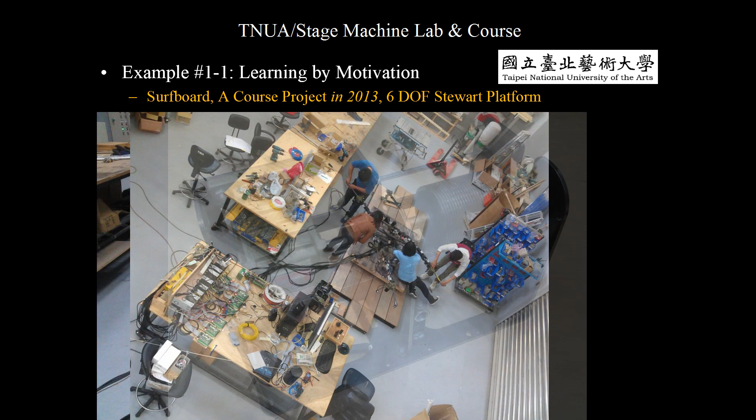My first example to share was a project for an advanced course in technical design. In theatrical department, all design processes have to mix the hands-on experience with design works. The topics of the projects were determined not only by myself, but also by my students, who would raise their choices according to their interest or enthusiasm about anything. As their instructor, I would advise and pick whatever could be the most appropriate for their learning curve.

In 2013, the students made a wish to build a mechanical surfboard, which might be used on stage. The famous movie directed by Ang Lee, Life of Pi, immediately came into my mind, where the Bengal tiger spent its last part of life with the protagonist Pi on a boat, which was animated by a mechanism called Stewart Platform.

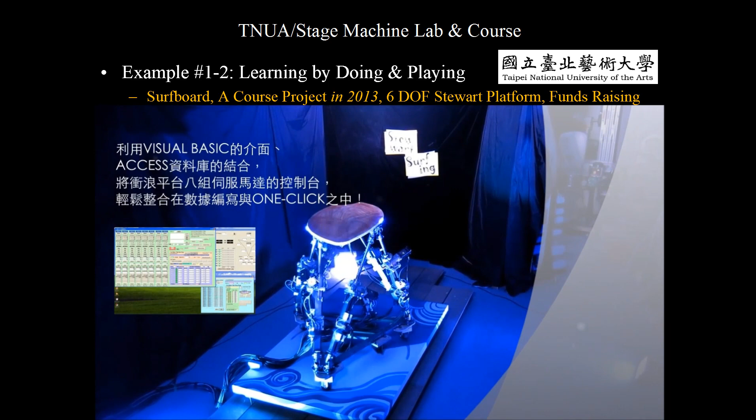Stewart Platform is a beautiful mechanical structure with 6 degrees of freedom, which are controlled by 6 individual linear actuators. Besides, the application could be used in Life of Pi or flight simulators.

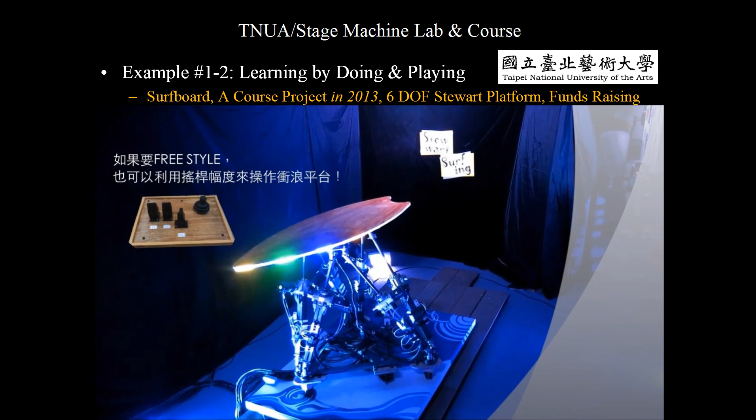I didn't know anything about Stewart Platform or how it works, but learning by doing is always the best golden rule. The more practical and the deeper I worked on it, the more exquisite I found about Stewart Platform.

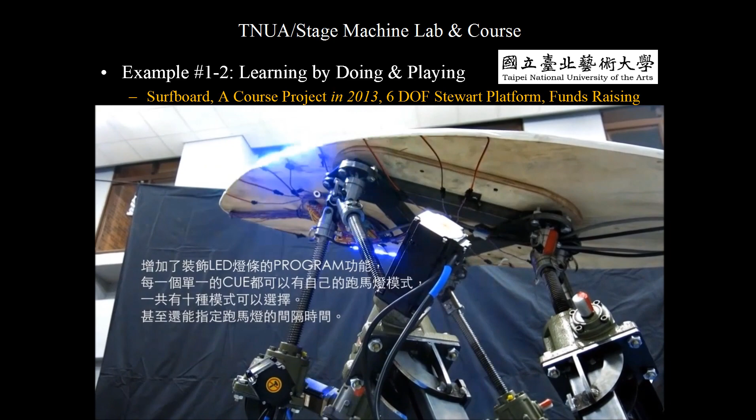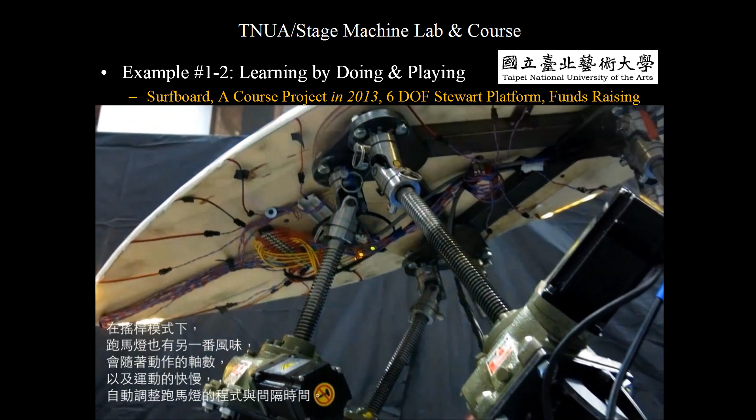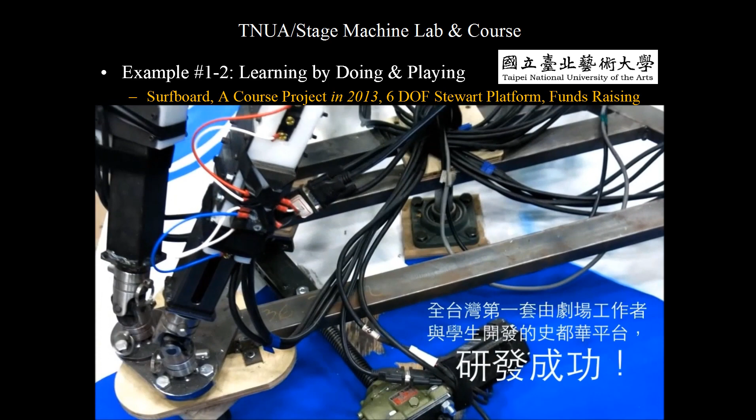4 technical design students and I worked together to design and discuss how to make it work. As soon as we had the whole plan, we found we couldn't afford it in our course. So we came up with the idea of raising funds through an internet platform, Flying V, and did get enough funds for our project. Through the project, we learned a lot about mechanical parts, positioning control, etc. And I also refreshed some of my programming skills such as Visual Basic.

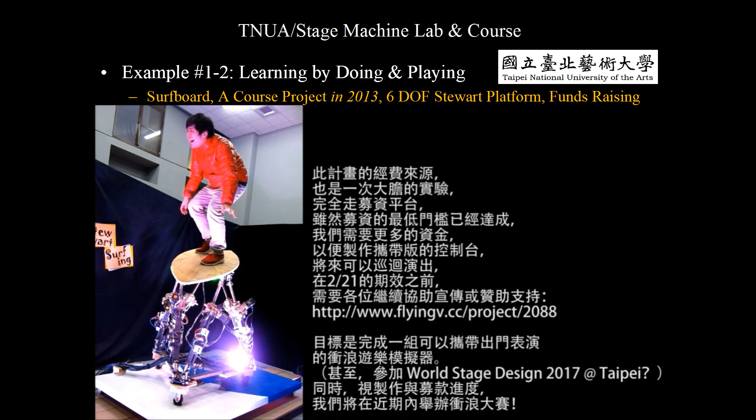The surfboard project did open a new window for my Stage Machine Lab. Year 2013 was kind of an important year for me, in addition to the surfboard. I began to attend stage automation for rock concerts in Taiwan. My new Stewart Platform work in TNUA aroused quite a sensation in Taiwan.

I was interviewed by newspaper, magazine, even the TV program. In the YouTube channel I run, many people asked me if they can, or where to, buy or rent such a surfboard on Earth. It's a mission impossible for me because I don't have a company, and, most importantly, the work in 2013 is just a mock-up without the possibility to be toured, due to its poor mobility.

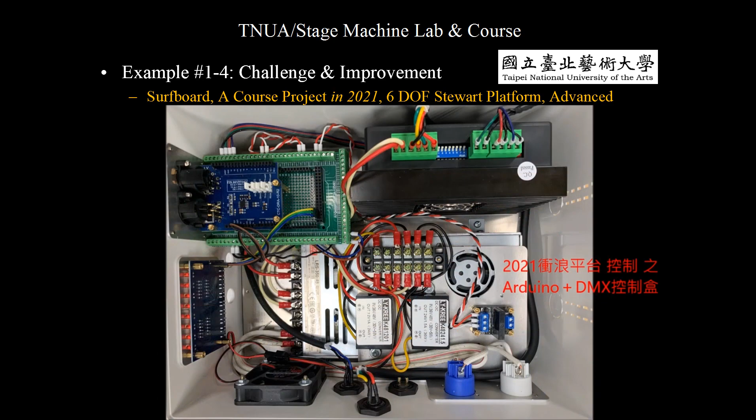8 years later, a local government officer asked me if I could send my automated surfboard to Taidong, where an international surfing game was to be held in 3 months. At that period, I had been using Arduino to teach technical design students as a tool to learn programming and automation for 5 years. The long history of inquiries for a surfboard to buy or rent became a thrust pushing me to renovate the surfboard machines.

The goals are to make it portable, easy to use and maintain, and controllable by theatrical lighting console.

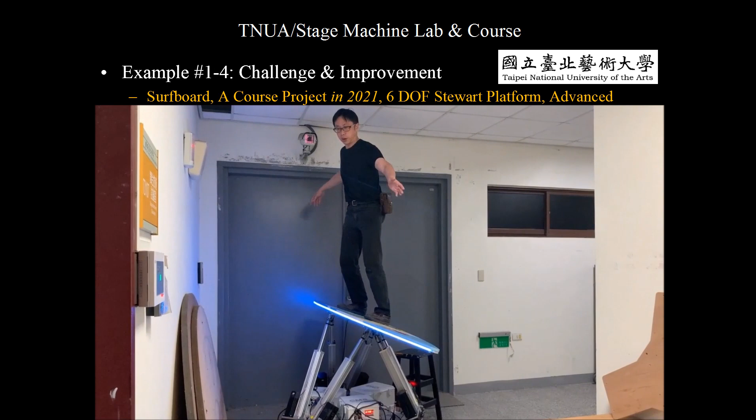With experience of 8 more years, and funding from CMS, I designed and built this new version in time for the international game, where it was displayed and provided publicly for free rides. The most special feature of the new surfboard was that the automation was triggered by lighting console, where I used simulating lighting console software on a laptop to set up the cues for the ride sequences at 5 different levels from easy to difficult. There were more than 300 people joining that free ride with a quite thrilling experience.

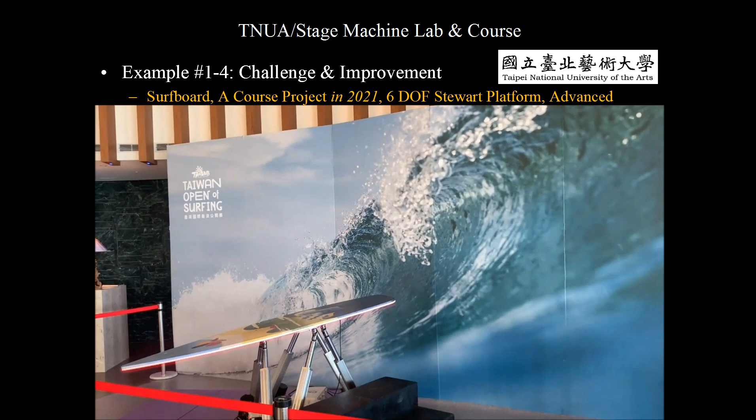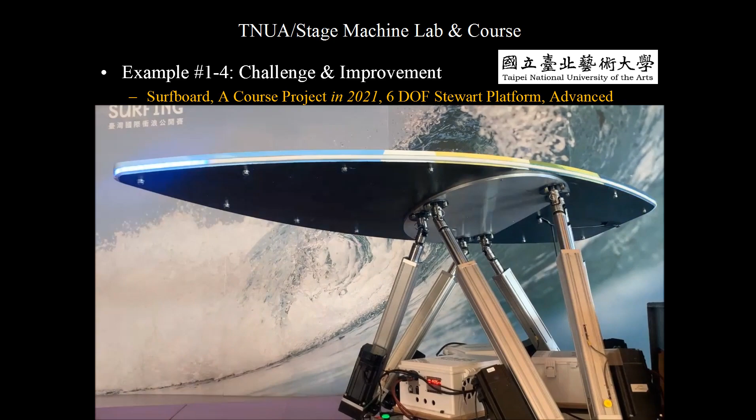The courage to open it to the public meant my confidence about the updated surfboard. I was so satisfied by the result, but the story didn't end yet. One year later, CMS even sold one more set, ordered by a company whose business was equipment testing, whose capital assets were more than $16 million, and whose number of employees was more than 250.

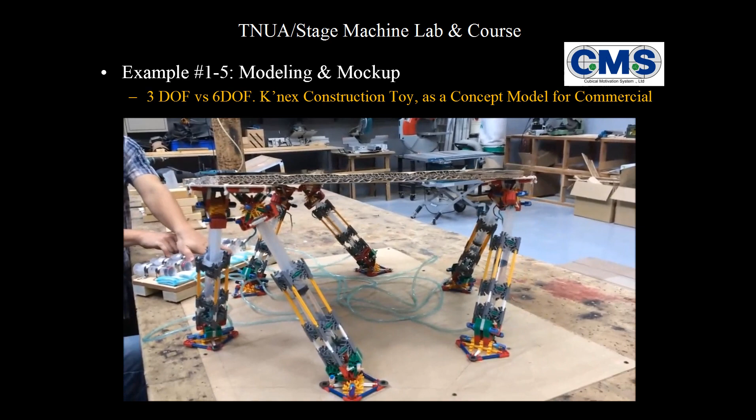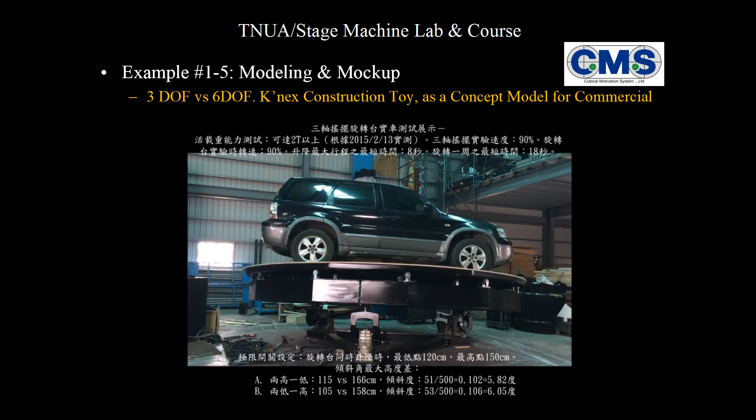In my lab and related courses, I often use a lot of toys or simple hardware to simulate stage machines. For example, I love a building block toy called K'nex, which could create a lot of simulation for mechanical motions. The 6-axis Stewart platform mechanism has some height issues when used in large-scale applications. After my research, I found that a 3-axis crank mechanism with universal joints would do the job with lesser height. I designed this monster, which could carry an SUV while spinning and tilting it in 3 dimensions.

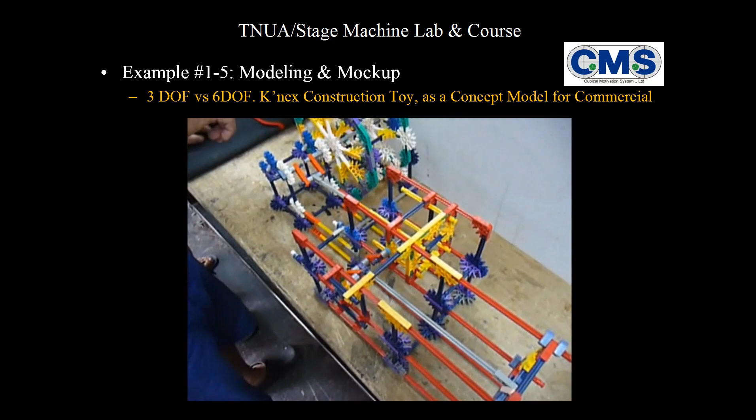From toy to practical work, K'nex gives me a lot of fun and bears a lot of potential for evaluating new ideas. Believe it or not, my accidental encounter with it came from a birthday gift I bought for my best friend's son. I never thought about using it as a tool until one day my friend told me that his son played with it for many years and never got bored.

For more than 10 years, I have been invited by Wu Zhen Festival as the technical consultant for international companies. In 2016, I flew over to Wu Zhen for a site visit with the technical team from a German company. I traveled with my wife Jessie and happened to visit the local museum, witnessing the beautiful creative work by Korean artist Cho Yu Ram. It's delicately and sensationally built and a lot of fun to watch.

Then I turned to my wife and said, 'I can do this too. But I am not an artist, I am a technical designer of the theater. So there's no director or designer ever asking me to do that.'

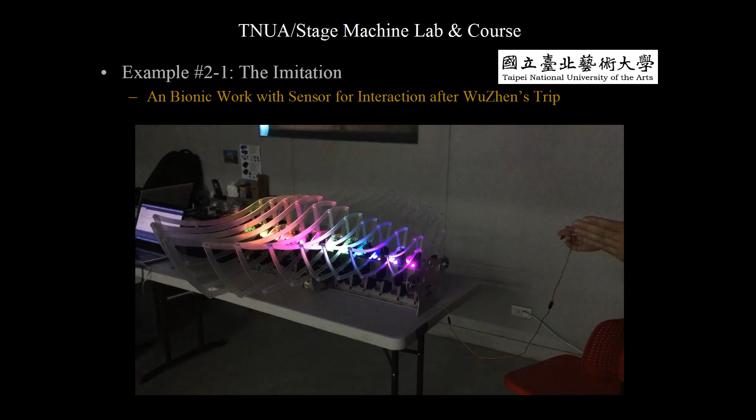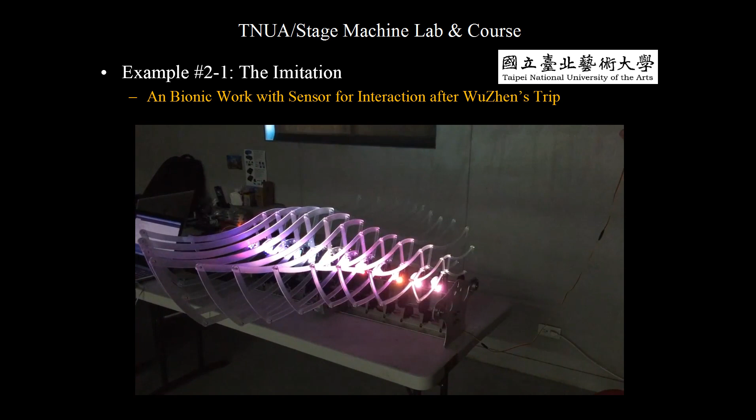By 2016, I hadn't used any 3D printing technique or operated any laser cut machine on my own. Our department happened to purchase a 3D printer and laser cut machine that summer. I have been a 3D CAD fanatic since I learned AutoCAD at Yale in 1998.

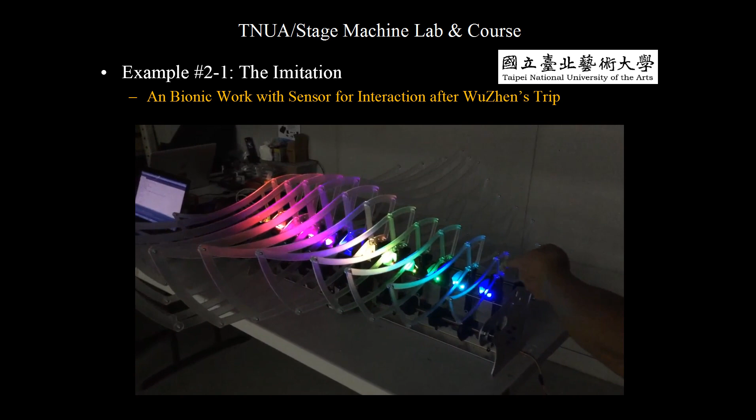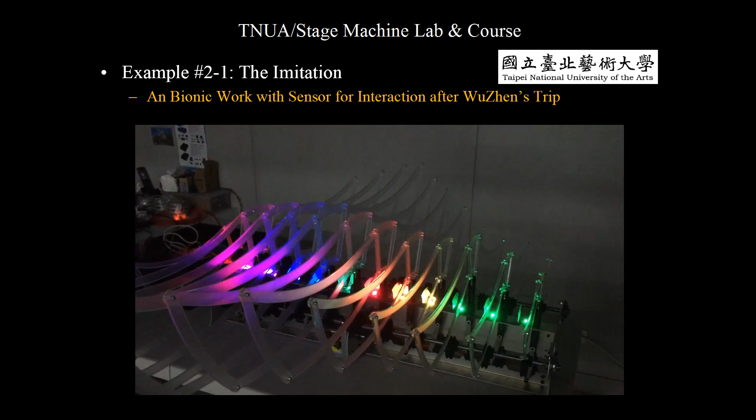After I came back from Wu Zhen, I quickly designed a simple bionic machine, inspired by Cho Yu Ram's work, and created this piece in 2 weeks using just our 3D printer and laser cut machine, with some servo motors, which has a sinusoidal motion on its spine, and an irregular jerky motion at random moments through coding. I also applied some simple LED lighting effects on this unnamed bionic work, which would respond to the dB value of a mic sensor with the lights changing into different extents of scary white.

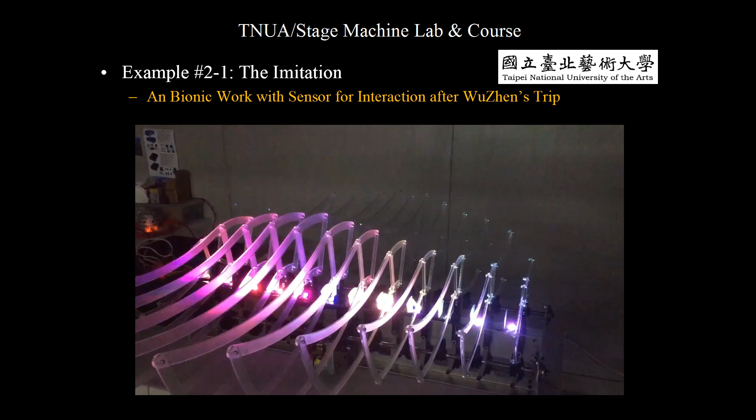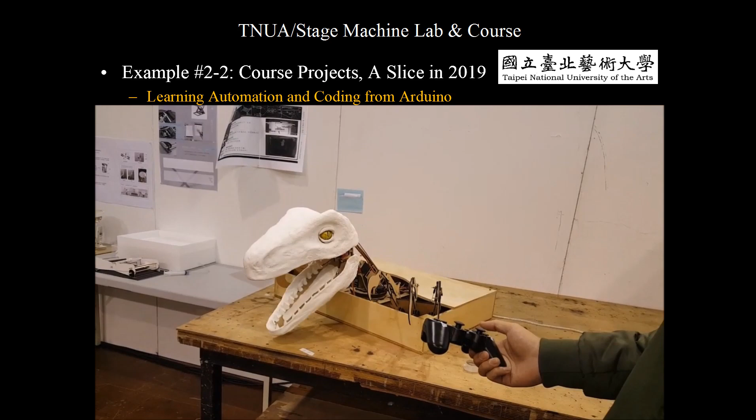I kind of fell in love with this creative process, although I still had no time for it given my teaching jobs. I want to show some works from the students I was teaching after I upgraded myself with Arduino. This is the first time I put mechanical design and programming together to teach technical major students of the junior year.

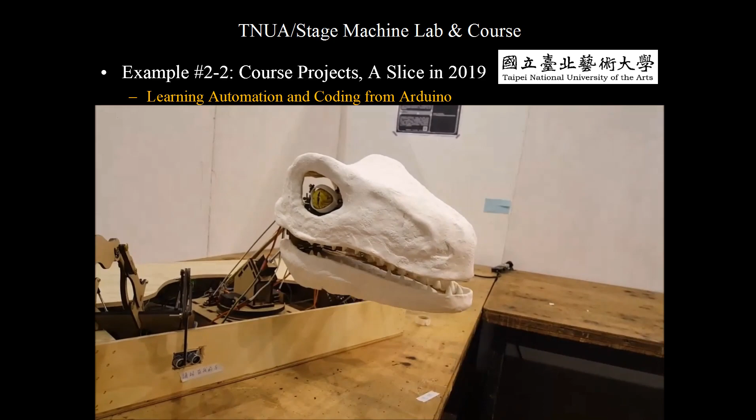Although it was kind of a teaching experiment, the results are quite exciting. As you can see in the video, these works represent a lot of potential from idea to realization. I always say, no matter if it is about learning or working, the motivation matters.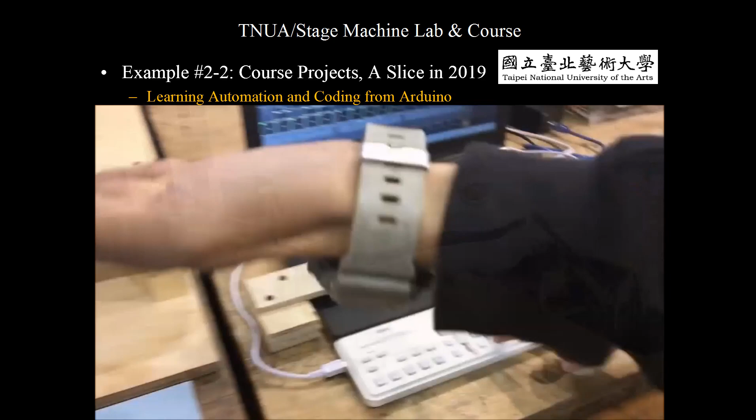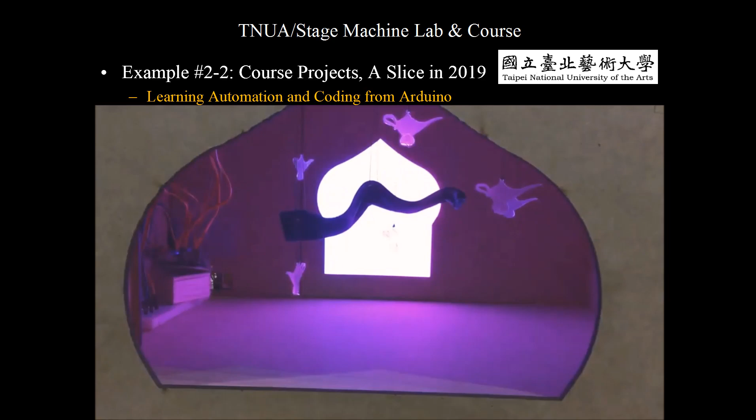In these final projects of a semester, for the very first time in their lives, the students touched the motor, wired the circuits, designed the mechanism, and wrote the Arduino programs. Many of them did excellent jobs, and even surprised themselves and their parents.

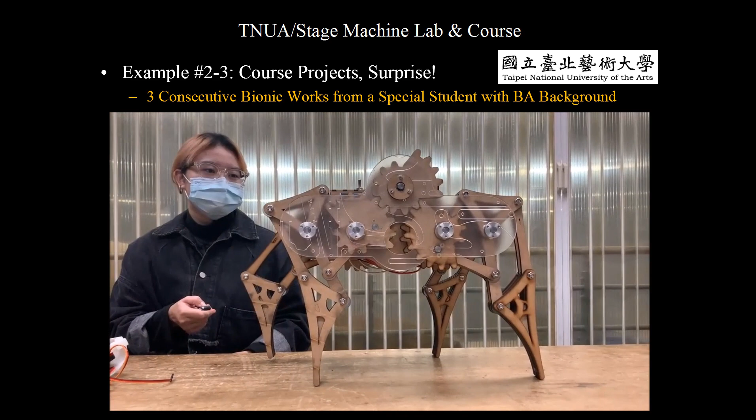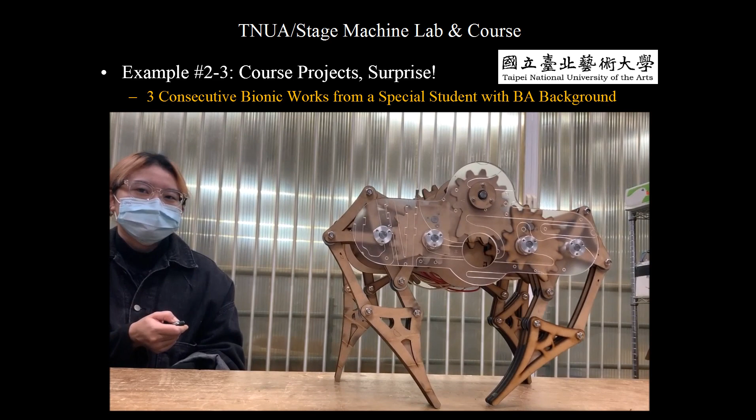In my lecture, I often introduced this special student to my audience. Miss Ru Ho Xiao obtained her bachelor degree in German Language and Culture Department. With such a background but strong motivation for learning, she entered my graduate program and majored in technical design under my guidance. During her two years of study, she had done three different amazing works with bionic projects, surprising those who knew her background. In fact, she might become the ninth student that I had taught and recommended who got admission into Yale School of Drama, where I graduated from as well.

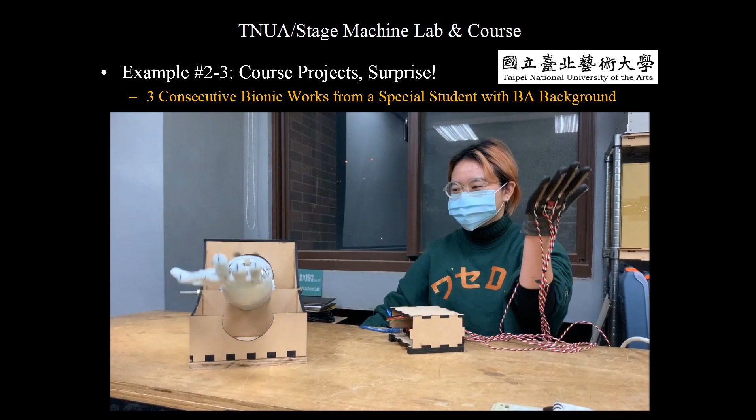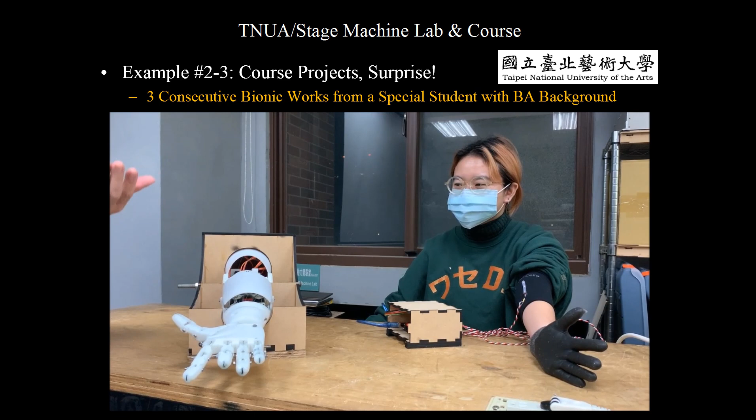In her work titled Robotic Arm, using the sensor of a simple flex resistor, she created a new approach for my lab. Bionic projects often appear in my lab works.

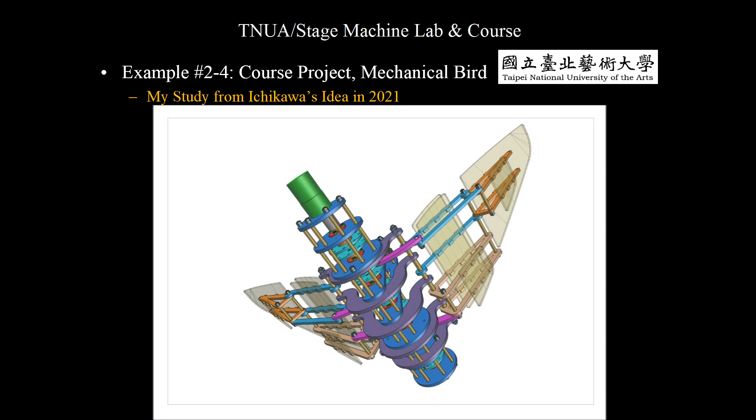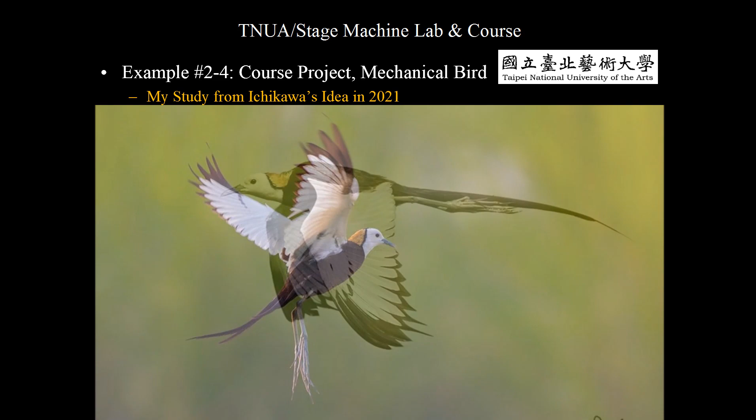In 2021, besides the new surfboard, I also worked on an interesting project about a mechanical bird. A junior high school president in a rural county asked me to help design and build an animated waterfowl. Before that, I had done a lot of projects using linkage mechanisms, but I didn't know how to do it properly. I sought inspiration by Googling the topic, and the best solution seemed to be Ichikawa's idea. Unfortunately, the information I could find was only some simple illustrations without much detail. And there seemed to be no one who had ever realized his idea in life, which was to use just one motor to drive both the inner and outer wings at the same time.

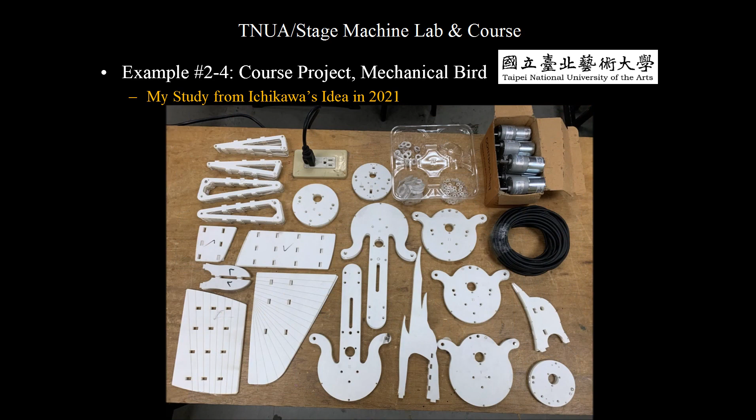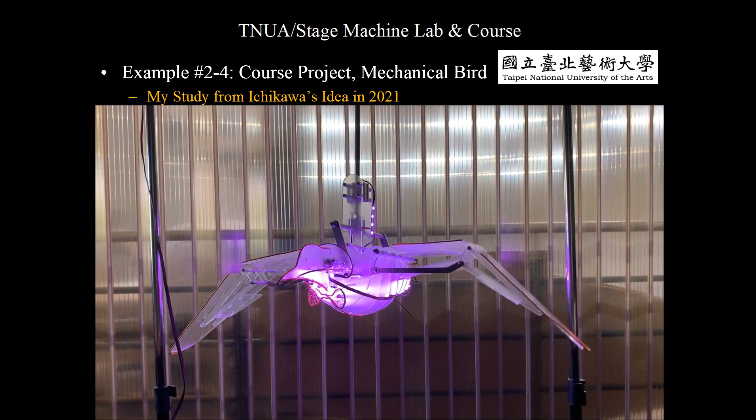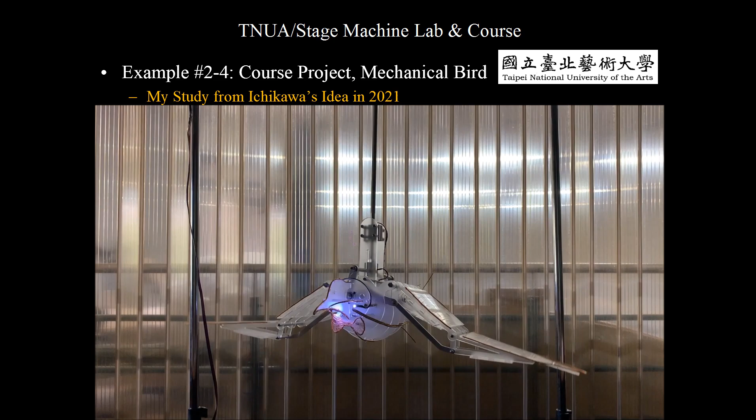I utilized AutoCAD's parametric design and simulation to revise the geometric proportion of the bird's wings several times. Meanwhile, I added a creative idea that the bird's body could also have an up and down motion by the same motor. The result was quite amazing, and it became the opening ceremony of the junior high school's art festival. Later, they even held an activity for families, parents, and young children to experience assembling the birds.

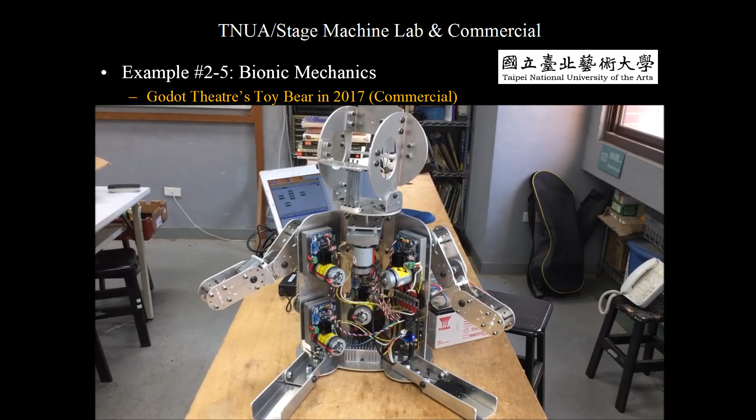Another bionic project was the toy bear for a commercial theater production in 2017. In this play, the toy bear was a gift from the father to his daughter. The director's request was quite simple, that the bear had to move his head or arms for simple responses. This project involved simple mechanical design, big servos, and remote control through PS2. I divided the motions into certain groups of commands as combinations for the director's choice.

The toy bear looked like a regular one until the last moment of the play. The father passed away and became an angel to guard his daughter. One day, when the daughter missed the father and talked to the bear, the bear suddenly moved and responded to the daughter's words.

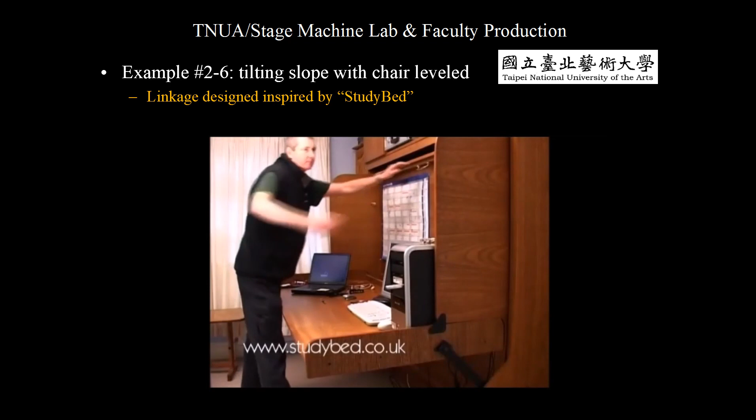Another class example I want to mention today was a personal project. One of the students in the TD group came to me and asked to do a project like a study bed. We took about 30 minutes to discuss how it worked, and due to limited storage space, turned that into a project called study sofa.

One semester later, we ran into a production requiring a similar mechanism. At first sight, they looked very different. However, these two projects applied exactly the same principle, which I call parallelism. Again, it turned out to be a successful project in terms of final results and learning effects.

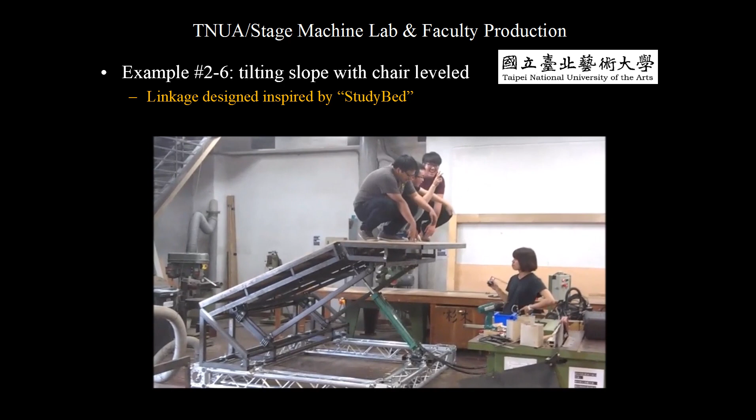This is how I enjoy my career. The projects for the lab or the courses could extend into professional fields, as long as the experiments are thorough, informative, instructive, and inspiring. And here is what I told the students often: don't ignore any experience you've learned from any experiment, which might become the critical solution for your next project.

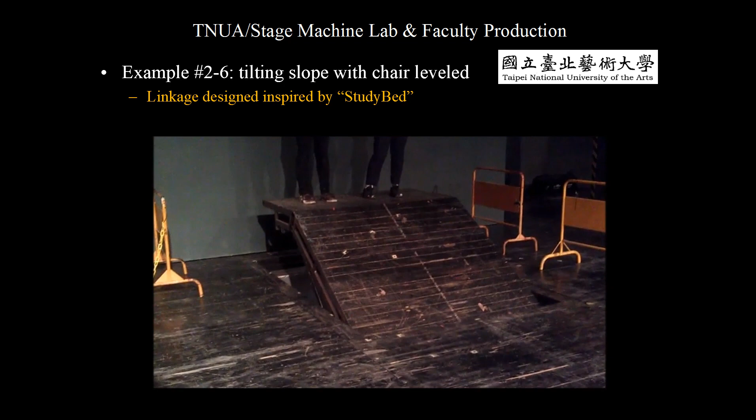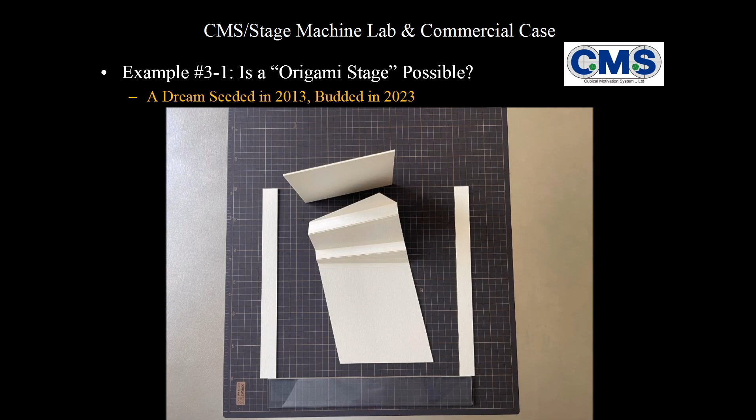The next example was also related to the linkage mechanism. The origami and paper cutting are the visual tones of the dancing work called My Dear Ho's dance company, MeImage, produced it in 2013 and entered into the final contest of the five best works in Taishin Arts Award, which has been the most eminent art competition in Taiwan.

I dared not answer Ho's request for cooperation because, first, the folding of non-rectangular shapes was quite difficult in terms of positioning control, as well as supporting the dancer's body on a floating stage.

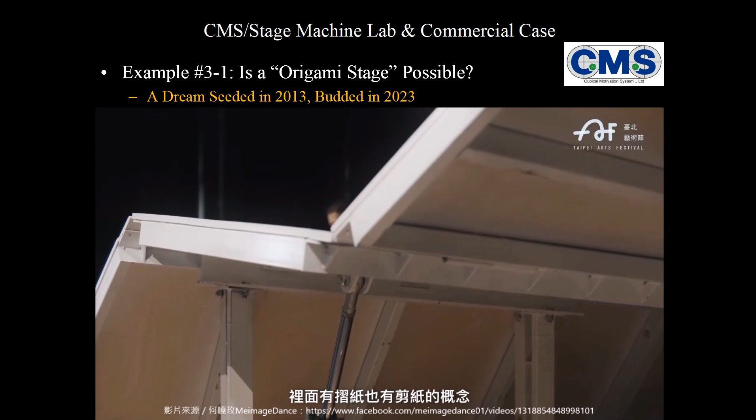Second, I was not competent enough at that time to deal with the material, mechanism, and the motion control simultaneously. In spite of its achievement, Professor Ho's wish for folding the stage had never been realized until this year, 2023.

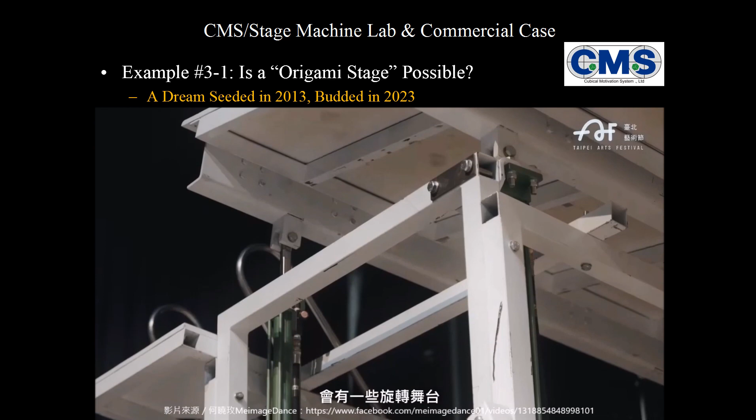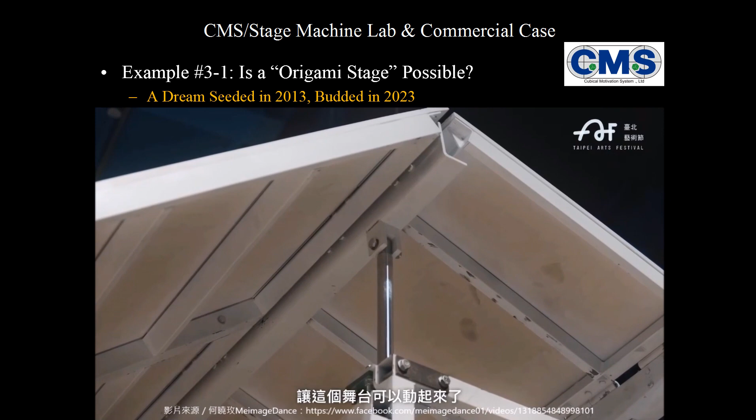At the end of last year, as the dean of the dance school in TNUA, Ho was invited to revive My Dear for Taipei Arts Festival. And she came to me for the folding stage again. I guessed I had more courage than ever, so we began to work on the possibility. During the design period, our proposal to the Culture Ministry for funding was rejected, but we didn't quit. Without enough funding, especially from the government, I came up with some weird idea.

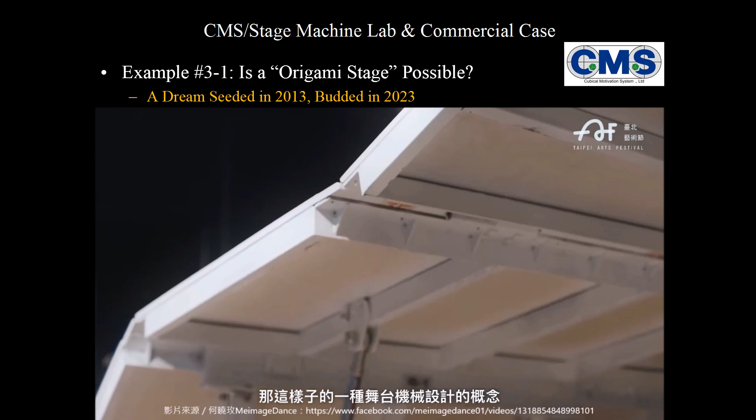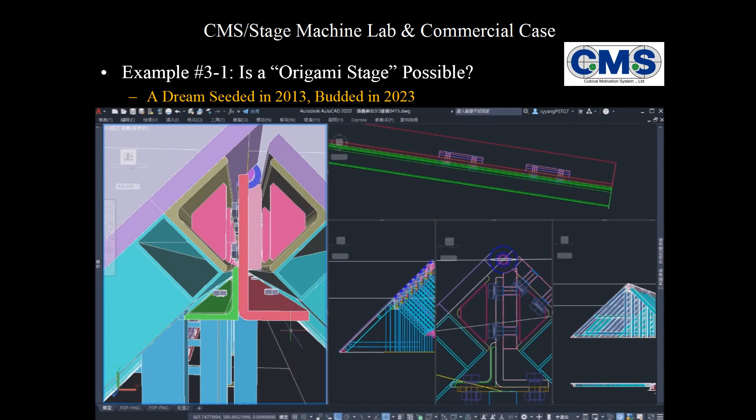For motion of a stage deck like this, with non-uniform travel distances among all the linear actuators, designers often incline towards using servo or encoder feedback systems to have precise motion control. But it is certainly very expensive, and meanwhile it would be very difficult to predict the distance command for each individual axis without destroying the decks by mistake. My weird idea could be relatively simple and much cheaper.

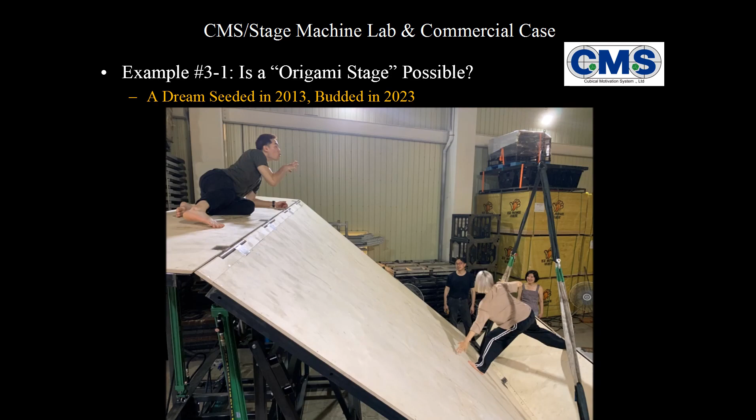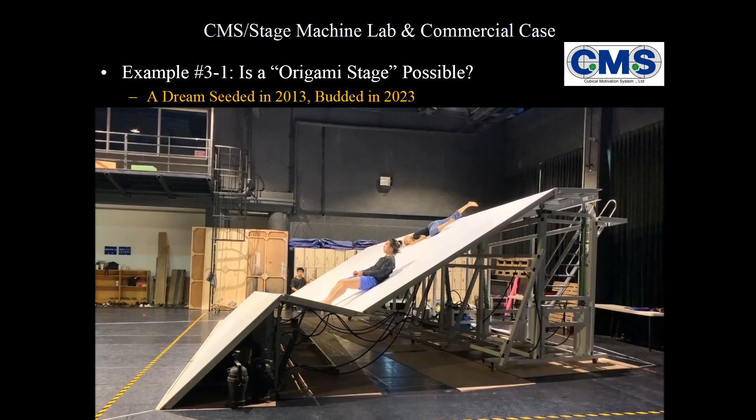By using the hydraulic system and applying Pascal's principle, which means a pressure change at any point in a confined and incompressible fluid would be fully transmitted throughout the fluid. The principle could explain how the lifting fluid jack works, and could apply in countless industries. With Pascal's principle, use hydraulic cylinders to drive the deck, and make sure all the cylinders on the same ridge line share one confined tubing. When the cylinders with the same tubing drive the ridge line, the pressure would be transmitted to support the deck. But the travel distance of the cylinders would be restricted by the rigidity of the irregular decks. As long as the decks and the hinges between them are strong enough, the origami goal would be achieved.

If we have time, I would like to share with you this clip of the performance.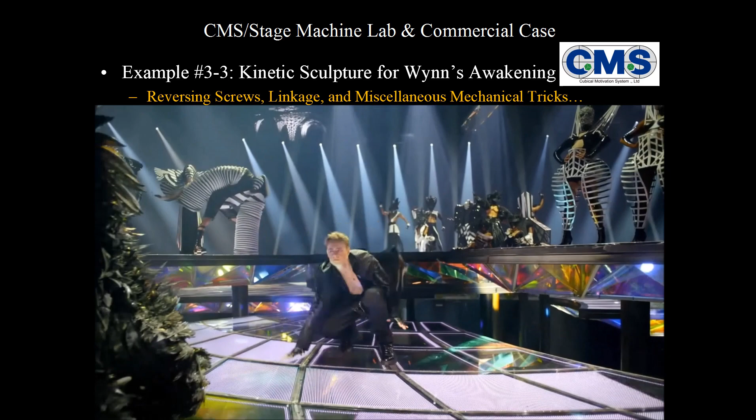At the beginning of 2022, CMS and I started a new project, VOM, which was to build 3 sets of kinetic sculptures for our upcoming new show, Awakening, in Las Vegas. Awakening, conceived and co-produced by Wynn Resorts, is an original and $120 million production opened in November 2022. It involves magic, fantasy, and more than 300 axes of automation to do the tricks on stage. I was invited to design and build these kinetic props by the set designer George Sapin.

George and I got acquainted because we had joined a project in Xi'an, China. He told me that he had tried to interview some scene shops in the US and couldn't find anyone he would entrust. Therefore he called me and asked if I would be able to take the job.

The goals of the 3 sculptures are quite simple. Each VOM has to wave its 28 wings sequentially to and fro by only one motor. And there are several configurations for the wings to be set and motivated by a lighting DMX control protocol. Because the props would be very close to the audience, the finishing has to be clean and pretty.

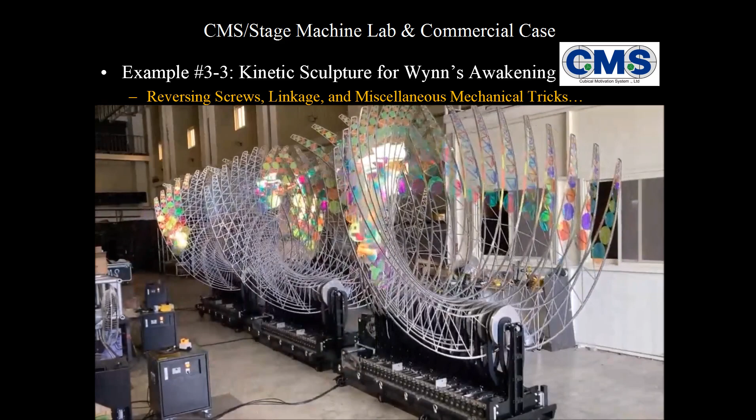We spent almost 2 months to build the mock-up for examining our design and found a lot of flaws to be corrected. Some issues were very difficult to deal with, so another 2 months were spent to get the mechanical parts right. After we finally showed a successful mock-up to the client, we got the order with quite a decent price. During the production, the client and CMS often started a video conference on Saturday 7 a.m. for all sorts of meetings.

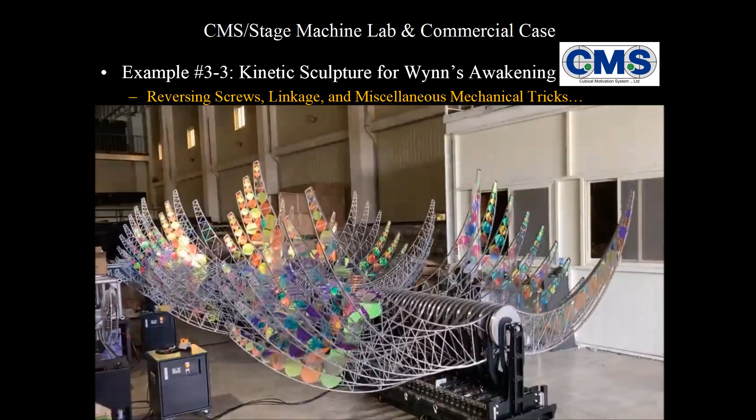Eventually the 3 sets were completed and shipped abroad to the port of Los Angeles for our installation on site afterwards. Almost all the employees in CMS were my students trained in TNUA's Stage Machine Lab. The job was nearly perfectly done, and it proved the success of the extension from the lab to the commercial world.

In 2013, I began my involvement in designing stage machines for rock concerts. In Taiwan, the business of rock concerts was done by a group of companies irrelevant to education of theater arts. The tour for singer Cheer Chen requires 2 huge rings in the air with the diameter of 18 meters for the big ring.

The main structure of the big ring would be circular trusses carrying LED panels and computer lights. The weight of the big ring was estimated as 3 tons. The goal of the winch is to manipulate the big ring and the small ring with different visual compositions.

The production company came to me by my friend's recommendation. After some conversations like the following one, they knew they came to the right place. Here was one question.

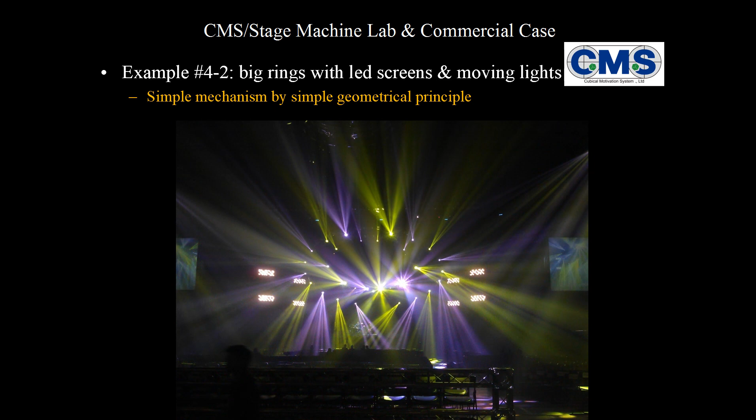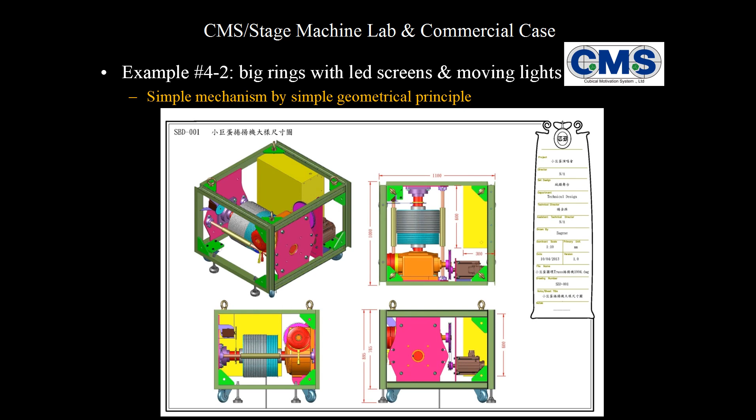Some people said each ring needs 6 points to rig because it will be safer with more suspension. Here was my reply: they were absolutely wrong. When you use more than 3 points to rig one ring with automated winches, there will be more than one wire loosen, because the geometry rule says 3 non-collinear points determine a plane.

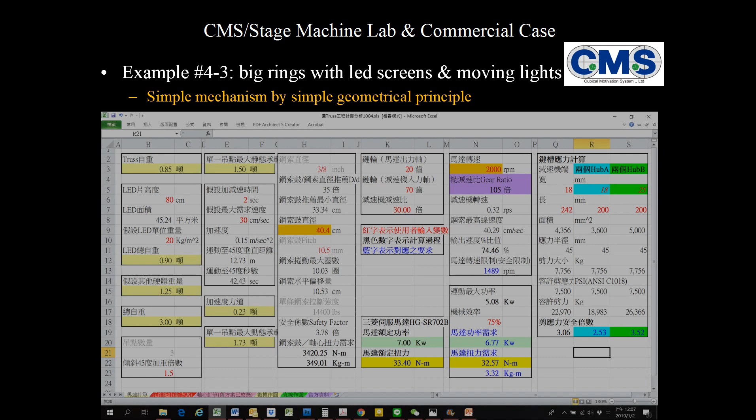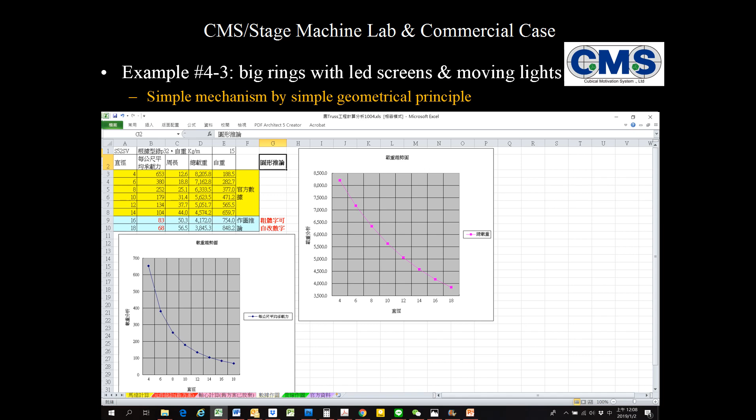Of course, this project involved a lot of engineering calculation, analysis, etc., where I found my engineering background had fully displayed its advantages. With the reference and specification from a famous company abroad and my analysis, we placed the order for trusses in Taiwan's manufacture and saved the budget a lot.

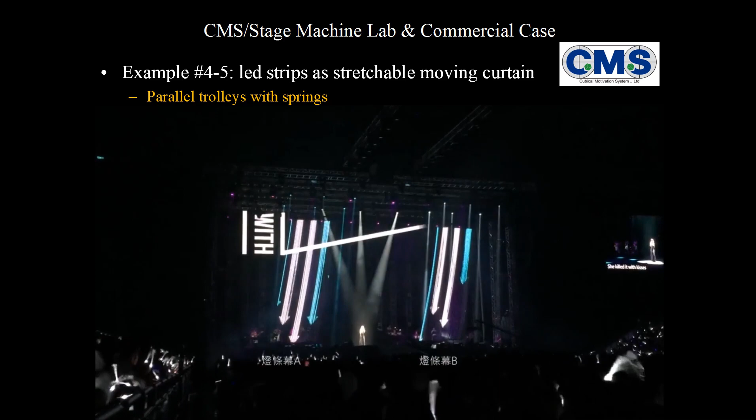If we have time, I would like to share with you this clip of the performance. Therefore, I began my adventure in concert touring business. As I said before, we started a new company called CMS, dedicating to the development of automated machinery for rock concert. This was the first project.

It had 2 huge transparent doors consisting of 96 10-meter-long pixel LED strips. The doors had to slide across the stage with tracks at the top and the bottom. The LED strips had to be tilted sideways, skewed or transformed, but the length had to be extended. It was the tricky part of this project.

The picture shown here was the core of the solution. Since the distances between the tracks at the top and the bottom could not be changed, the only way to elongate the LED strips was the spring, which I hardly use. However, other than spring, there is almost no substitute to fulfill the request of the show.

Now, allow me to play the video clips from the tour of Mayday.

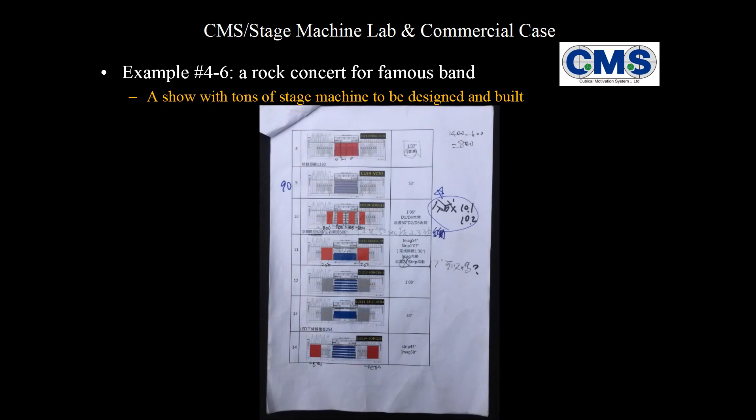In addition to regular lifts, we had several 25-meter span curved LED walls to be lifted up and down independently. At certain moments, they needed to be synchronized with other elements of automation. There were many stage machines designed and built in a very short period of time.

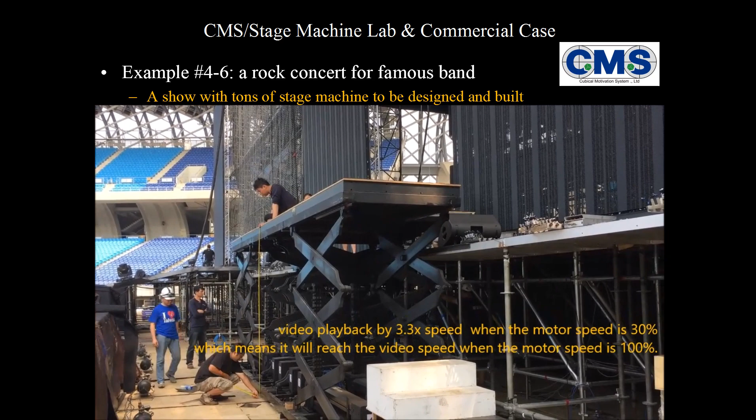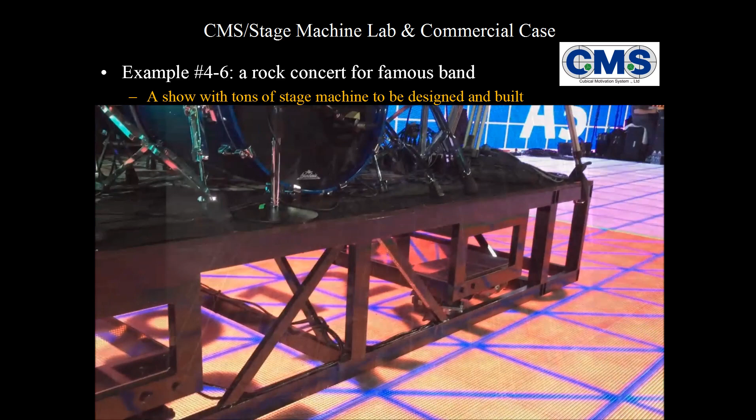As you can see on projection, they were quite unusual to theater industry. Each moving element could be as heavy as 2 to 3 tons. However, this kind of scale and weight are like common language in entertainment business.

4 huge LED panel doors, each had a gigantic size of 6 meters wide by 12 meters high. And the total travel distance covered a 75 meter wide space.

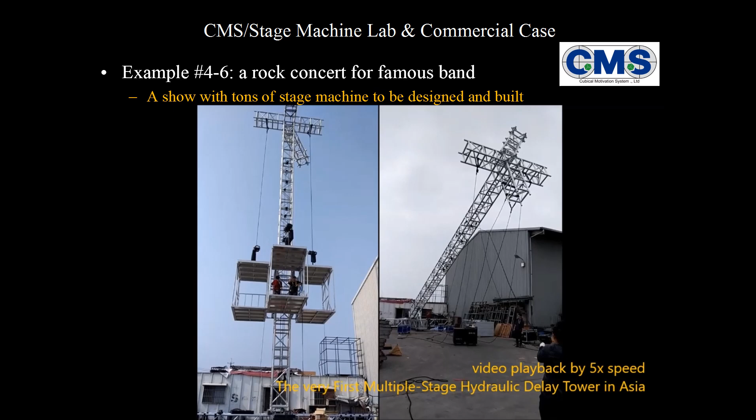In this rock concert production, CMS also designed and fabricated the self-lifting delay towers. The delay towers have at least 2 functions. The first is to hang the line array speakers at the rear part of the audience, because, as you know, the length of the stadium could be as long as 200 meters across.

The audience sitting far away couldn't have the coherent feelings about visual and audio unless they can hear the sound directly from the delay towers. The second function is a bonus, that the crews can shoot the follow spotlight directly from here, with the needs to create wonders for the audience.

With the funds coming from the deep pocket of the audience, there are always more possibilities to push the development of technology to infinity and beyond. I am so glad to share with you about my stage machine lab and its extension to the industry as the keynote. And I believe it is not the end of the story.

For example, I am right now working on my surfboard project, version 3, to command it with the sensor attached to the surfer's palm, so that he can manipulate the surfboard on his own without any programming from the console.